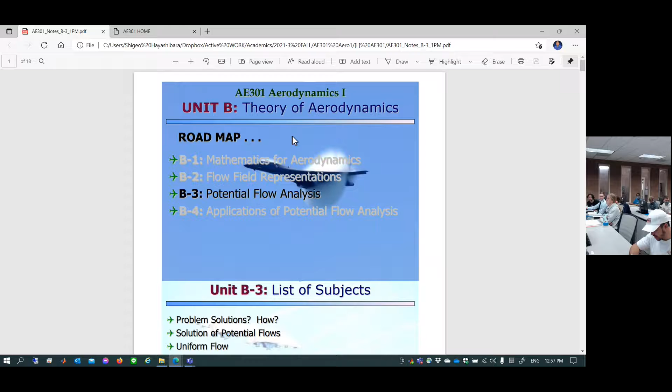It's such a fun class. Is it? Everything is so much fun. Everything you talk about. Okay, I'll say this. If you try, you will pass. If you do everything he says, you'll get a B, practically guaranteed. And since his assignments are open-ended, if you give more than what he asks for, he's willing to give you a 95 to 100. Oh, yeah. I've never had it. We'll see how that goes, though. Including last 8 classes.

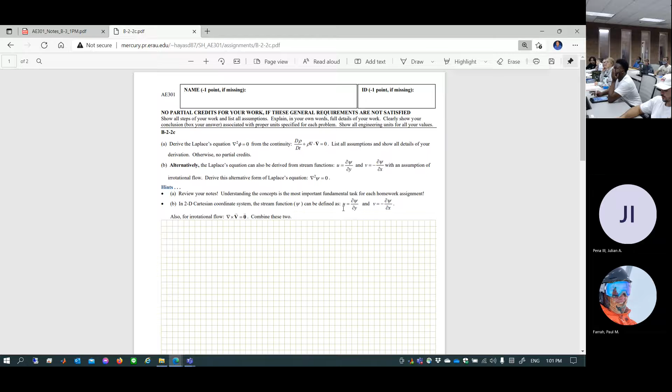So, as you know, you have homework which is due coming up Friday night. So, if you have any question, okay. One of the problems is probably impossible to do. What was the question, Michael? B-2-2c? Yeah. No, that's easy. Oh, it's not, then it's this one. B1. Oh, it must be this one.

This is probably something that if you really understand the stream function kind of problem, fine, but otherwise it's probably near impossible to solve. So I'm gonna show you my solution. I'm not gonna go over it, I just show you. And since it's videotaped, that means I release my solution. Can you also post it? I'm not gonna post it, I'm just showing you, because this is your work. But I just wanted to show you how I did it. B-2-2b, okay? This is actually quite important homework. B-2-2b.

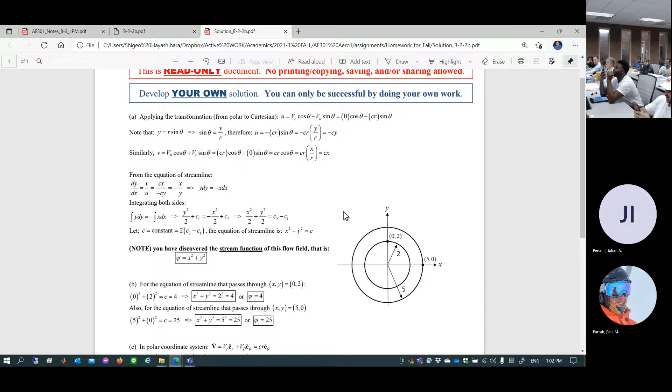Let's understand properly what I'm asking. I'm asking you to find the stream function of this field. That's the first thing you have to find out, because once you find the stream function, the rest is easy. The stream function is the solution of a Laplace's equation that governs the flow field.

The entire purpose of this unit B3, which we're beginning today, is solving the Laplace's equation using a technique called superposition of elementary flow solutions. That's what we're going to look at. This sets the very basic standard and purpose, and why you are doing what you're doing. Do you really understand it?

So velocity field is given. What is the original velocity field? Is it given in Cartesian? I think so. So the polar velocity field is given, and the first step is you're going to express it in Cartesian.

So velocity is given in polar coordinate. You're going to convert from polar coordinate to the Cartesian coordinate system, trying to express your velocity field in terms of x and y.

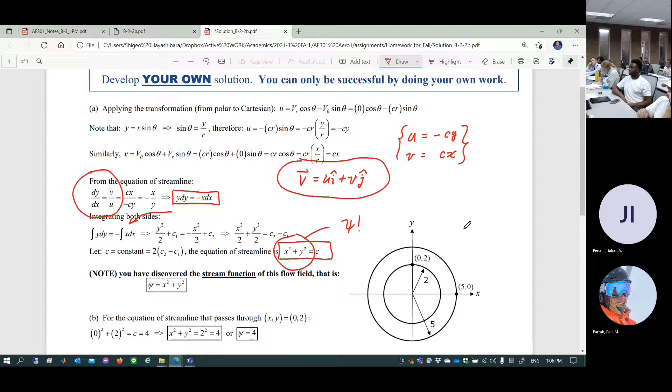So the rest is easy, right? Suppose you plug in x, y equal to 0 and 2, this defines a particular streamline, the equation of the streamline that goes through x, y equal to 0 and 2. That corresponds to the constant being 4. So this is the equation psi equal to 4.

What is the equation of the streamline that goes through x, y equal to 5 and 0? That gives you the constant becoming 25. So this is the equation of streamline psi equal to 25. Do you want us to draw the circle? Yes, because this is the equation of a circle. You can draw any number of streamlines by setting lots of different constant values.

That's what you're going to do in project 2A, 2B. Do you understand? Go ahead, question. I was just going to ask, because doesn't the aerodynamics of the particle go in a specifically circular motion, doesn't it?

It does, it's called a vortex. Yeah, it's a vortex type of flow. We've seen wingtip vortices, this kind of flow here. So this is actually one of those physical phenomena representing vortex flow.

So do we define a constant for psi and find an equation, or do we find a point that passes through to find psi first? Yeah, because this is the governing function. Now the rest is easy. If you set psi equal to different values of constants, that produces each one of those equations of streamline. No, my question is generally, are we setting psi to different values, or are we telling at different points what psi is?

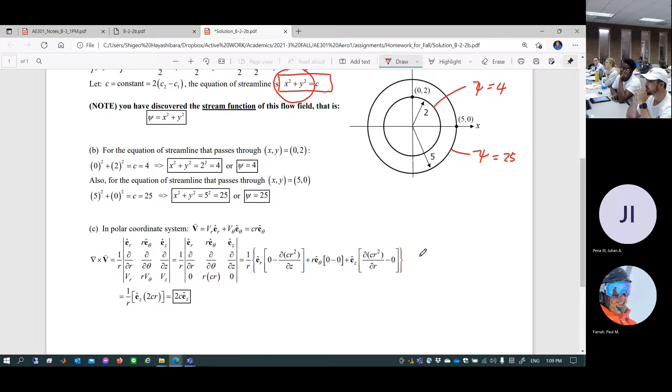Good point, Robert. Forget about all this, this is not even being asked this semester. So last semester, apparently, I asked you, okay, what is the vorticity of this flow field? That was problem C.

Sorry, oops, oops, sorry, oops. I shouldn't have said that because this could be a trap. I always do traps with my homework assignment because I create my own homework assignment. I can easily create a little bit of change and variation of it, to try to see if someone's copying from last semester without knowing what you're doing.

Does that explain why? Don't play games with me. Anyways, does that explain why? I appreciate your question, Robert. Really? The last solution, that's the solution.

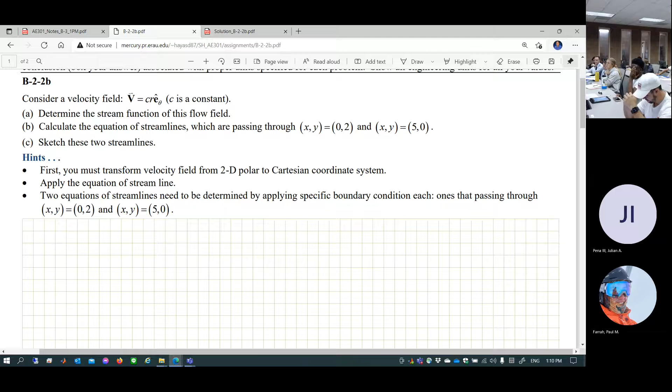Which one, from unit A? Which one, the way you were converting? Again, which one? Okay, okay, let's say, take a look at which one. That's the solution of unit A. Which one? It's for unit A. Which one? I would say A1. A1, A-1-2b.

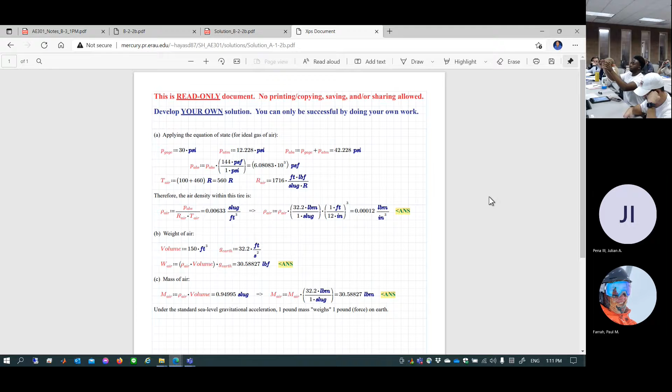Is that involved conversion? This is A-1-2b. There's just one part where like, you're converting, but the fractions aren't flipped correctly. Which one? I don't know if it's in that one or. I don't know, I studied it a long time ago.

I still don't know what you're asking. What are you asking? So, is that the trap you're talking about? Where, I can always create any trap. In other words, I pretend like, hey, this is the same problem, but I can change a little bit from last semester. So it looks like the same problem, but it's not.

I can easily do that because I create all the problems, I create all the solutions, I know everything. Would you send us there? I am the creator of this whole system. Okay, officially done, I know everything. So you cannot play games.

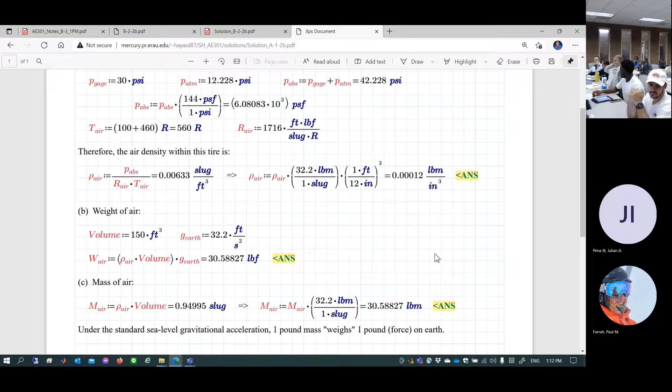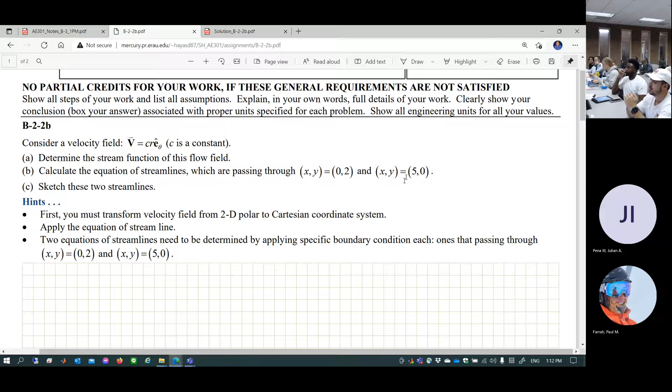So anyways, thank you for your question, Robert. Please be specific, I can walk you through that if you tell me which one you're talking about. Anyways, any other questions? So I showed you what I did. Forget about this, let's see. Let's see the sketch, right? This is the sketch.

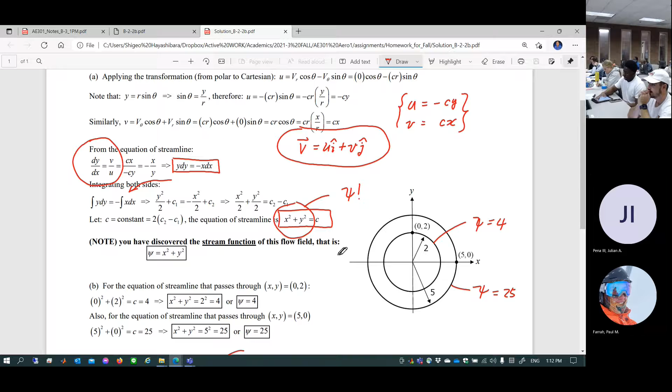So this is essentially a contour plot of the stream function psi of the flow field you define. That's exactly what you're going to do in project phase 2A and B. Understanding the concept is quite important. You can solve this kind of problem without knowing what you're doing, and that is very dangerous. It's easy because it's the equation of a circle, but why are you doing it? The purpose is to define the stream function that actually governs this flow field. That's the whole point of doing Unit B3.

Any questions on the homework of Unit B2? I have a question on the homework, but it's not on the project.

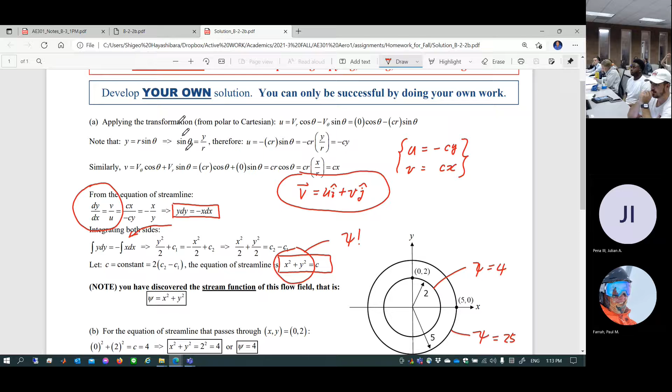Yeah, so project, okay. Project 2A, yeah? It's a fun project. It looks fun, I like the pretty graphs. Yeah, I want to be able to make those. It's just not happening yet. Shapes and colors, yeah. It will take some time to get it.

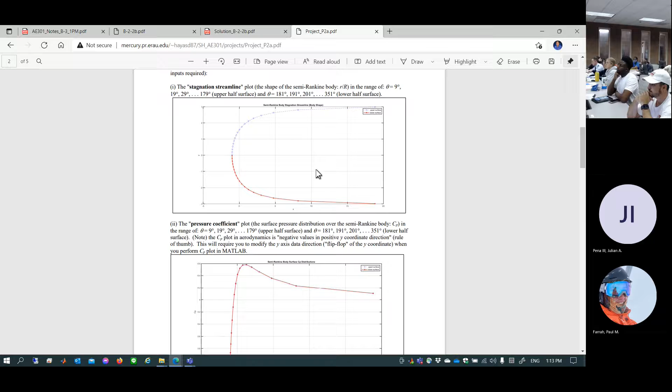In other words, project 2B, not 2A. Project 2A, you are going to actually do this kind of plot. This is what I hope to cover today or next class. This is a superposition of uniform flow and source, which is going to create the flow over like a leading edge of airfoil. And then the other one is, of course, flow over a circular cylinder with different values of the stream function equations.

In other words, this one represents psi equal to 0. This is one of those equations of streamlines. Psi equal to 0.4, this is a positive value, this is a negative value. You can draw any number of lines corresponding to each different value of psi. This is a contour plot, and each one of them represents the equation of a streamline. This is the psi equal to 0 line. This is the psi equal to 0.4 line. Psi equal to 0.8 line. That's what you saw in the homework assignment, right?

Okay, essentially it's the same thing. Once you know what psi is for this flow field, the rest is just drawing contour lines to represent the flow field. That is potential flow analysis. So I guess it's a great idea to start early, and as I move on in Unit B3, hopefully lots of these questions will be answered naturally, before you finish your project.

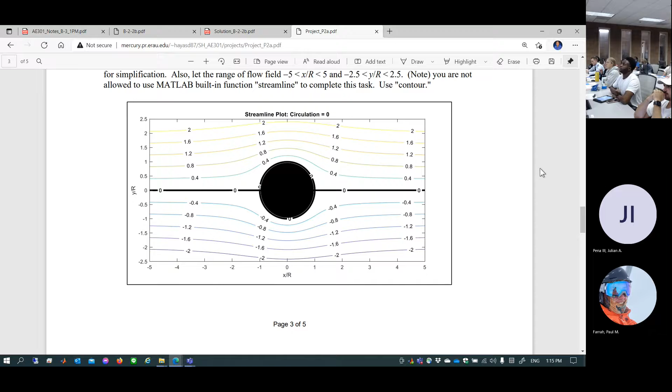So don't worry too much about it. As you get more understanding, it's going to be easy. The code itself is a piece of cake. I actually have a code here, but I think it's too early to show you. I coded everything in MATLAB. I'm going to show it, I'm going to share it with you. Well, I don't have to share because this is something you have to produce anyways. I don't have to share my code anyway. So if it looks similar to that, it probably works. Well, it looks exactly the same. It should be—not the same. Exactly the same, yeah, okay.

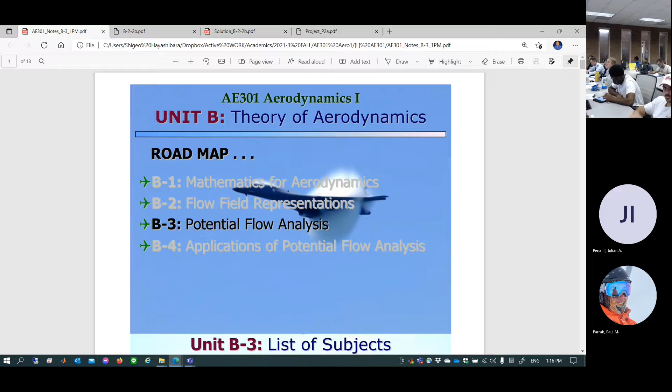All right, so let me get in. Let's get in and take a look at Unit B3. It's going to be exciting—actual application of potential flow analysis. Step-by-step mathematical process to analyze the flow field.

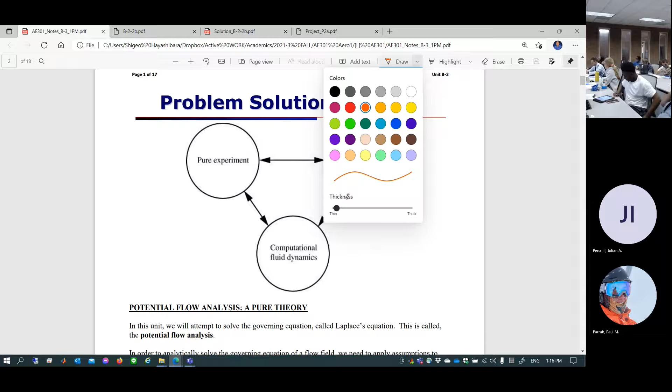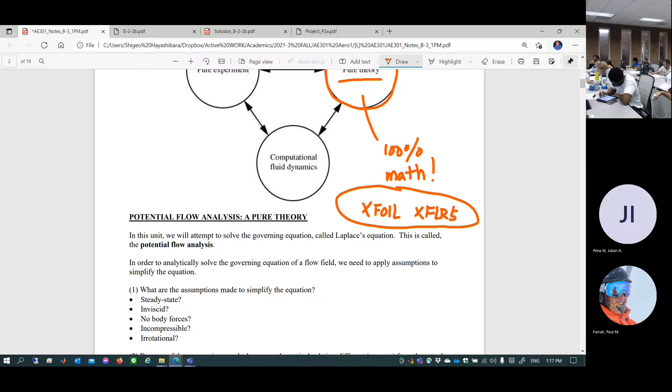So first of all, before we even begin, what are we going to do? This is all about the theory of aerodynamics. That means you're going to step right into pure theory—100% math. That's the reason why you can actually use software like XFLR5, XFOIL. This is essentially 100% mathematical analysis of the potential flow field. So before we even begin, we need to understand what simplification assumptions are already built in.

Simplified equations based on those conditions. So this is steady state flow. Viscosity is completely ignored. Body force is zero. That means gravity is not even considered. Incompressible means density is constant everywhere. Irrotational is quite an important mathematical simplification.

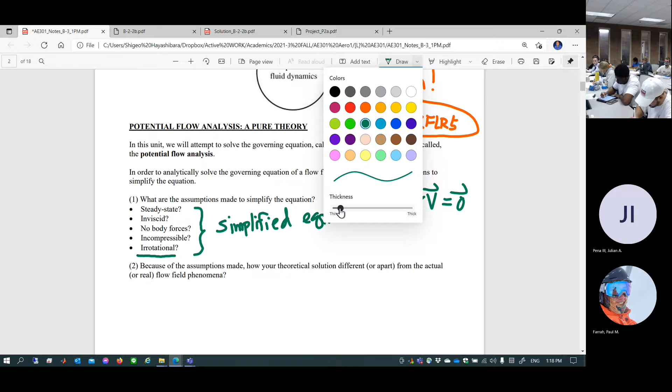In other words, vorticity, del cross V, if you compute it within the flow field, it's always zero. Irrotational flow field. And then you can say lots of interesting things. You can express an equation similar to Bernoulli, but not quite Bernoulli, something called the ideal flow equation, right? Like P plus 1/2 rho V squared is constant everywhere in this flow field, right?

And then once you know the velocity, you can determine the pressure coefficient, Cp is equal to 1 minus (V over V infinity) squared. This is called pressure velocity coupling. Okay? So those are the equations you can, of course, pick up and use. And then this is called ideal flow. Ideal flow is not equal to real flow.

So ideal flow behaves kind of weird because you're completely ignoring viscosity and density is constant everywhere. It's not going to separate over the surface. In a real flow field, of course, your intuition says if you pitch up your airplane like this, it's not going to fly, obviously. What happens? Stall. Separation. Of course, this kind of thing happens, right? This is real flow.

But if you do the same thing for an ideal flow field, it behaves differently. It behaves somehow like this, maybe. And then you go like, oh, wait a minute, I don't think so. So you have to be very careful. When you receive an ideal flow solution, you're not going to take it as it is and apply this result to real airplane analysis. You can't do that. Of course, this is ideal flow.

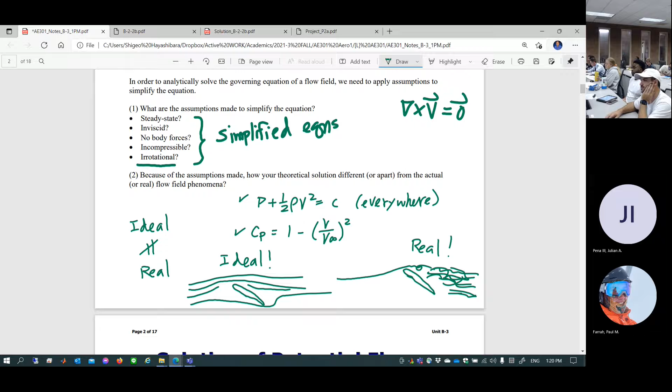This is ideal flow. And then what's the Mach number? Anybody? We don't care about Mach number. It's ideal flow. But we know density never changes. So realistically speaking, if the Mach number is 0.7, density is not going to be constant. You have to correct and modify the values calculated from ideal flow analysis. That's called the Prandtl-Glauert correction. We don't cover that. Software can do that, of course.

Go ahead. So is the reason there's no turbulent flow because it's irrotational in the ideal model? Turbulence. Where does turbulence come from? Flow separation. What causes flow separation? Viscosity. Viscosity is completely ignored. There's no boundary layer formed in ideal flow. If the boundary layer doesn't exist, we cannot even say whether it's turbulent or laminar flow, because that's all about the boundary layer. Flow separation is also boundary layer separation, but there's no boundary layer.

That implicitly means the flow hits the surface of this body, creating a stagnation point, then slides over the surface, then another stagnation point, and flows away. That's ideal flow: over the surface of the body, the flow slides over. In a real flow field, you have a boundary layer, velocity zero on the surface. There's no such thing here. But you can add those kinds of models later to make it a more realistic solution, okay?

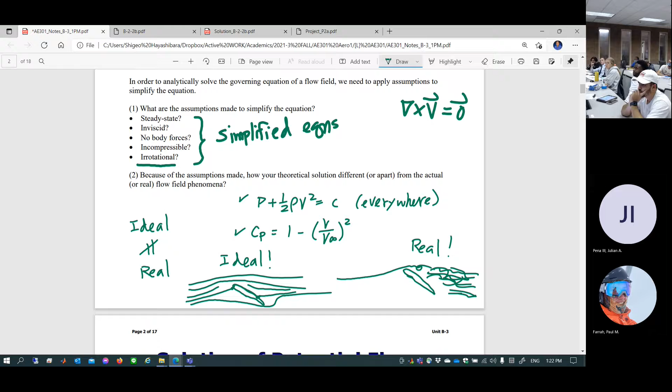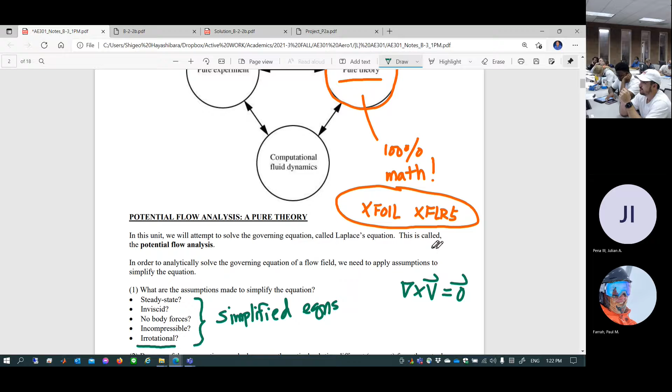So now we are talking about pure theory, meaning this is 100% math. In order to have 100% math, you have to simplify it and remove all those variables, otherwise you have to deal with second order nonlinear partial differential equations. Have you seen that kind of stuff? Do you want to do that? You can, but you cannot solve it by hand. You can only simulate using computer simulation, which is not a solution at all. So we are going to do hand mathematics. If we cannot do hand mathematics, it's not called the theory of aerodynamics, but we have to start from there.

It's always easy to make things more complicated. It's easy to start with, okay, I'm going to solve this three-dimensional airplane, fully turbulent, highly unsteady, high speed. Let's just solve it using CFD. People say that kind of stuff. Do you think you can do it within a year of your senior design? I can guarantee there's no way.

It's almost like you're saying, I need a PhD. By the way, I need it by next weekend. Same thing, you're saying that. There's no idea there. I mean, what do you think? It's an insult almost. I spent 10 years. I mean, practically speaking, I became blind because I read too many papers. Then I barely got a PhD.

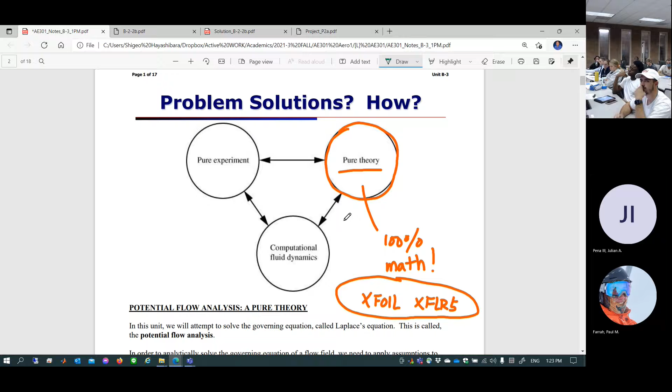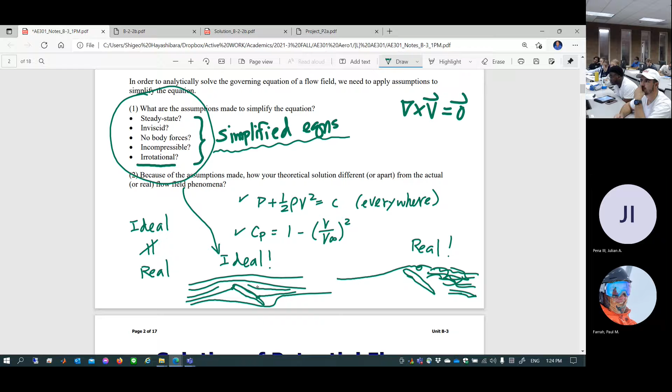Okay? Why is that? Because there are way too many things involved. Too many variables. And humanly speaking, you can never understand every detail of such a thing. But we try to understand because we apply simplification equations. Okay? So this is the background, always. And then what we can get is the ideal flow solution. This is not the real flow, but the great thing is this is a 100% pure mathematical solution. Okay? So let's begin. So this is a step-by-step process you're going to be involved in.

We are going to start with someone's already available elementary flow solutions of Laplace's equation. Elementary solutions exist for Laplace's equation. There are so many elementary solutions, and some of them are applicable directly to flow field analysis. That's called elementary flow field solutions of Laplace's equation. I'm going to introduce you to 4 different elementary solutions, okay?

Now, once you are given those elementary flow solutions, you are going to combine those. Okay, I can add uniform flow and source. That's going to create a kind of flow field. This is kind of similar to flow over the leading edge of a semi-infinite body. But I need a trailing edge too. Okay, let's superimpose source and sink and uniform flow. That is going to create a flow over a body with both leading edge and trailing edge.

Well, we want to do an angle of attack. Well, okay, it's just a shift. This is source, this is sink, uniform flow. Okay, well, this is some kind of body, leading edge, trailing edge, pitched up. But I want to have a NACA 2415. Okay, now what?

So now we are moving to the panel method. Okay, we are going to pick small tiny panels to represent the actual shape of your design. Then superimpose against uniform flow. Then set the surface equal to the stagnation streamline. So we are going to cover one step at a time. Okay. So elementary solutions, we are going to introduce first of all uniform flow. Uniform flow is something like this. Typically from left to right, magnitude V infinity in the positive x direction, uniform flow. Okay.

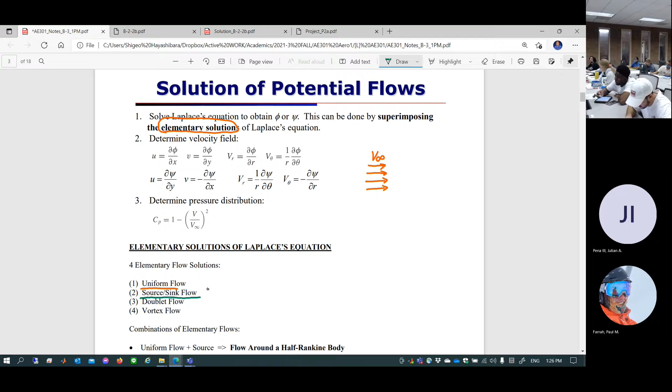The other thing is source and sink flow. This is, quite interestingly, a straight violation of continuity. Divergence becomes either positive or negative, which means mass can be created or mass can be destroyed, like a black hole. There's no such thing in a physical flow field, but this is source and sink flow. This is one of those solutions of Laplace's equation. We actually pick it up and use it for flow field simulation.

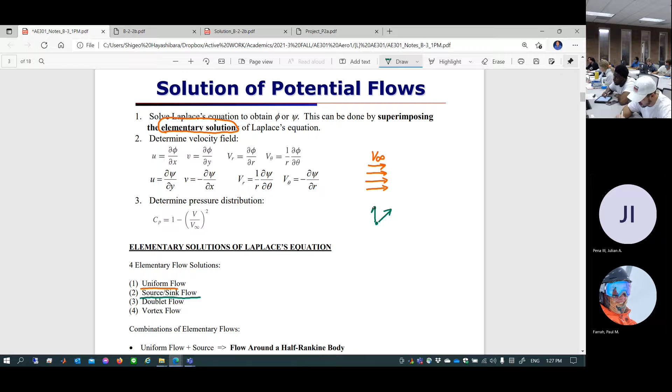So let's say a single point. Flow all of a sudden starts to happen from nothingness with a magnitude lambda. Magnitude lambda is a volume flow rate or mass flow rate, either way. Mass flow rate if it's compressible flow, volume flow rate if it's incompressible flow. This is called source.

Like I said, this is a straight violation of continuity. So you cannot really use this single point as a realistic mathematical solution for a real physical flow field. This is called a mathematical singularity point. Be careful. A mathematical singularity point is something you can never pick up as a physical solution of this whole thing. Okay. Sink is like a small tiny black hole. Right here, all the flow is sucked right in and disappears. This is called sink. Magnitude is negative lambda.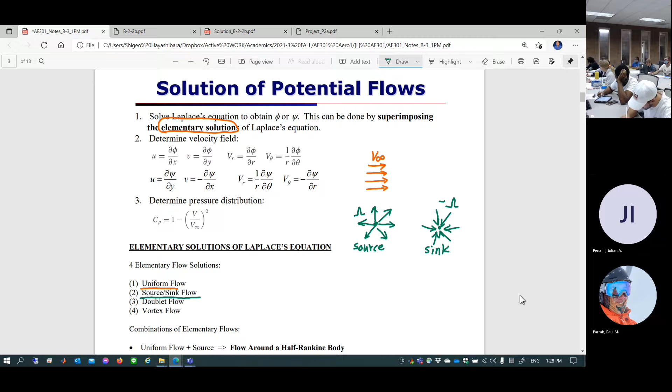Source and sink flow field. This is one of those elementary solutions of Laplace's equation. We can actually pick it up and use it to simulate the flow field. Okay. The other one of the elementary solutions, doublet. Question, go ahead.

What's that symbol next to your source? Lambda. Capital Greek. So draw a delta without the third bar on the bottom. Negative lambda. Yeah, that looks like an omega. This is omega, this is lambda. If you write it quickly enough, no one's gonna tell. Stop that third bar, and there you go. Stop completing the triangle. It's upside down. Do not complete the triangle. There, lambda.

This is omega. It's like octopus shit.

Okay, anyway. Lambda. Doublet. Doublet is a combination of sink and source pair at the single point with the same magnitude. So if those two combine into the single spot, it is going to create the flow field just like this, okay? Source creates the flow and sink sucks right in. This kind of flow field.

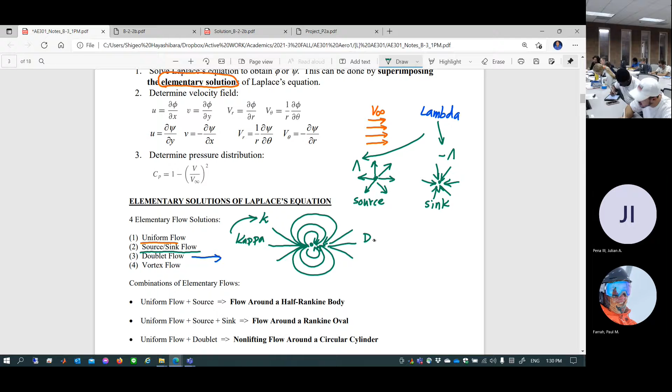Okay. The number 4 elementary flow solution is called vortex. You've seen it already. So vortex is a flow field which is essentially creating the streamlines of concentric circles around a single point. So this is called point vortex. Now this is again irrotational vortex. That means the vorticity is 0. However, there's a circulation. Magnitude of vortex is a circulation. Gamma. Uppercase gamma.

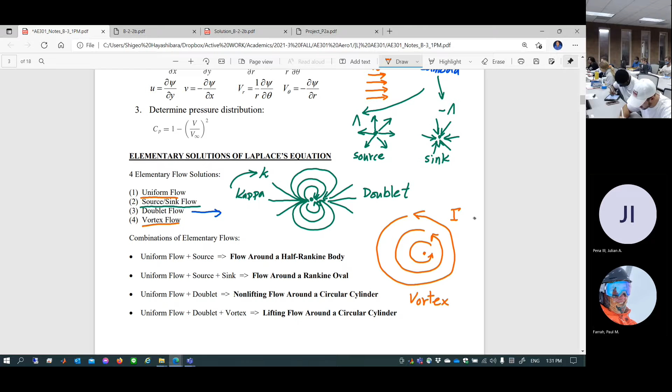So those are the 4 different types of elementary flow solutions. Then we can superimpose those things to create flow field. Question. If the vortex flow is going the other way, is it negative? It's negative, that's right. Is that the same for a doublet? Yeah. So doublet could be positive or negative, direction-wise. You could have a negative doublet, positive doublet. Left-hand side is source or left-hand side is sink.

For that example that you showed us in class for the homework, B2, is that stream function graphing a vortex then? That's a vortex, yes. If you have a doublet where half of it's a sink and half of it's a source, do they have to be of equal magnitude? It's a negative magnitude, direction-wise. It's going to be flip-flop, so negative sign comes up.

So what if they're not the same magnitude? If it's not same magnitude, it's gonna create a weird flow field, which is not doublet, but some kind of flow field. We can simulate that. I have software. So I'm gonna run ideal flow machine. This ideal flow machine actually simulates any of those. I'm gonna probably give you the website link for this toy. You can actually simulate.

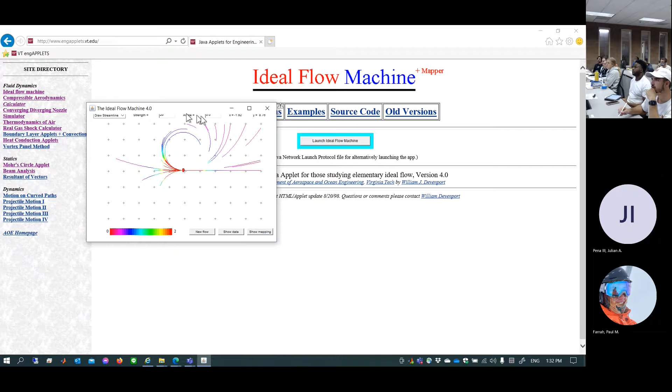So what is a doublet of a strength of like 20, and then put it in here. Then you can draw a streamline. So this is a doublet kind of thing. You see that? This is a doublet flow field. You can do any number of streamlines. The streamline is the same value of psi in the data field, the same thing as a contour plot. It's always symmetric.

So if you superimpose source and sink with different magnitudes, it's probably not gonna be symmetric. Are you allowed to rotate the doublet? I don't think so. Ah, you can. Rotate means what? The flow field. Well, yeah, you can do that. In other words, like an 8, it would be like an infinity.

Could be, I'm not sure. So that means you're going to superimpose in the y direction, so the source and sink pair is going to be staggered up and down. That could be. Okay. Anyways, you can do lots of things if you are curious. Let's just use this toy and find out. You can superimpose anything.

So like I said, those are the 4 different kinds of elementary flow solutions. In this class, I'm going to start with uniform flow plus source. This is the superposition of 2 solutions, source flow superimposed with uniform flow. This creates the flow field around a semi-infinite body, simulating the flow near the leading edge of a semi-infinite body. Uniform flow and a source and sink pair create the flow over some kind of body. If the source and sink have the same magnitude, it creates a symmetric body, so it's flow around an oval.

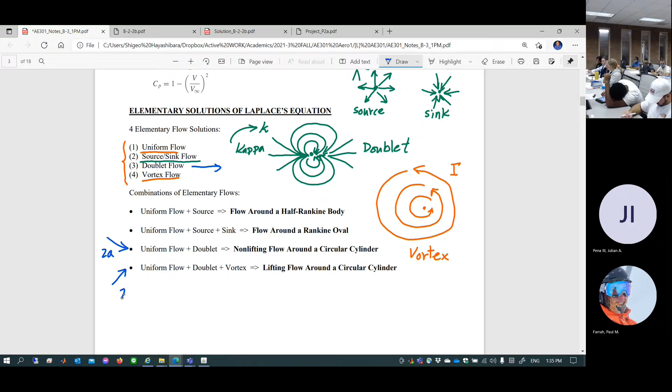So this is basically something you want to know. This is project 2A, this is project 2B. So stay tuned. Everything is purely math. If you don't understand your math, it's impossible to do project 2A and 2B, period. But if you know the math, it takes 10 minutes to code. That's my impression. If you don't know math, it's impossible. If you know math, it's a piece of cake.

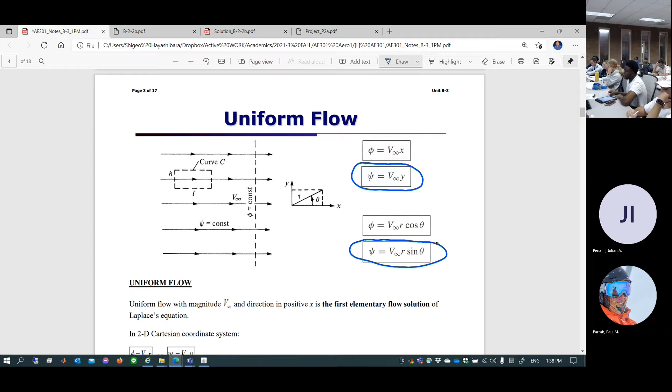One thing you have to understand is in your project, you always have to go back and forth transforming coordinates from Cartesian to polar and polar to Cartesian. You have to do that all the time. MATLAB can easily do that, right? Of course. So this is the solution called uniform flow. This is one of the solutions of Laplace's equation.

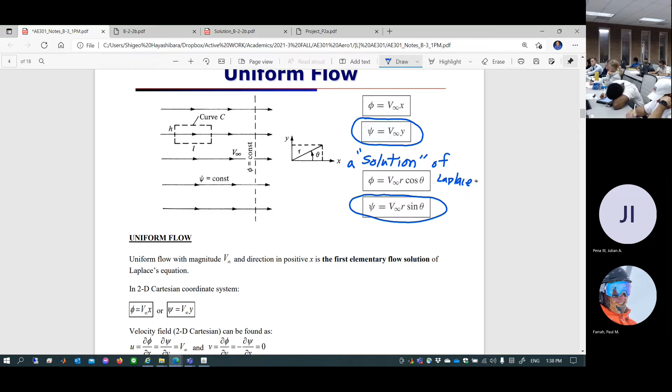Called uniform flow solution. Okay, so we are going to pick up psi. You can pick up phi if you want to. However, you can quickly construct the 2D velocity field out of psi or out of phi. So if you take the partial derivative of psi with respect to y, that is the velocity x-direction component u. Okay, if it's 2D Cartesian, velocity is u i plus v j. Or in 2D polar, this is going to be Vr e_r plus V theta e_theta, right?

So the velocity field can easily be given. Taking negative d psi dx is going to give you v. If it's polar coordinates, you can take 1 over r d psi d theta, which is V infinity cosine theta. V theta is minus d psi dr, which is negative V infinity sine theta. Those are the velocity field. You can quickly get it.

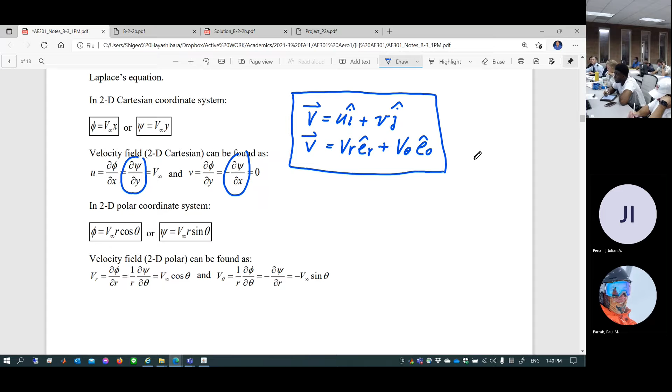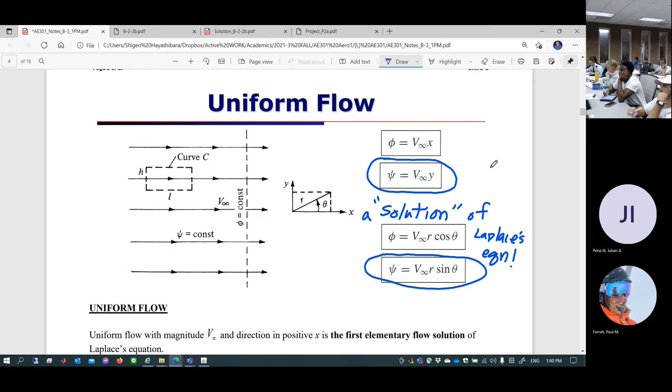So next thing is, let's just introduce you to source and sink. This is the second elementary flow solution of the Laplace's equation, source and sink, like I said. We are going to probably focus more on psi, the stream function. This is a solution of the Laplace's equation called source and sink. Source is positive, sink is negative.

Now for this kind of flow field, it's probably easier and more convenient to employ a polar coordinate system rather than Cartesian. The flow field is always velocity only in the radial direction. Tangential direction velocity is 0. Velocity is always in the radial direction, either outward or inward. This is called source. This is sink. The magnitude is lambda. So lambda over 2 pi r, that's the velocity Vr.

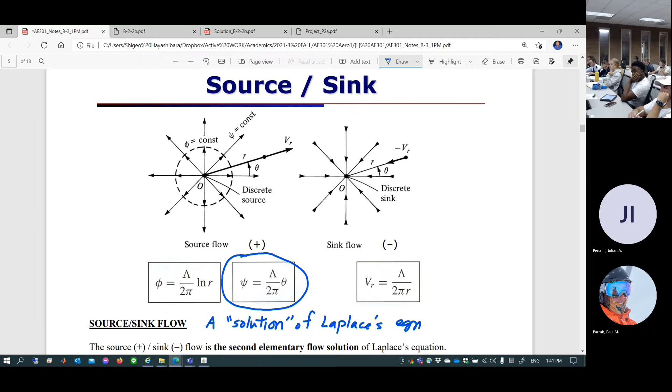How do you get that, by the way? Same thing. You're going to get the velocity field from 1 over r d psi d theta. So if you do 1 over r d psi d theta, you're going to get Vr. This psi is lambda over 2 pi times theta. So this is 1 over r d/d theta of psi, which is lambda over 2 pi theta. If you do this partial derivative, this is going to be lambda over 2 pi r, isn't it?

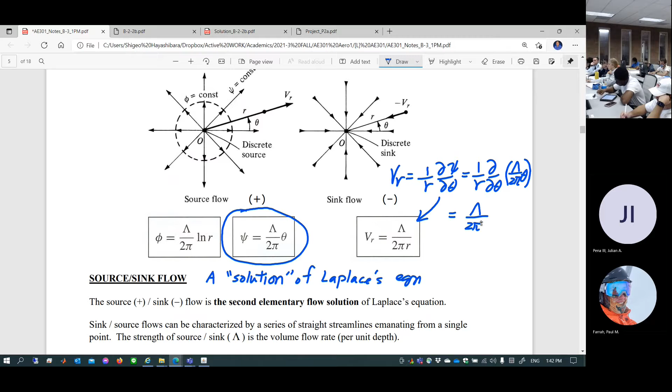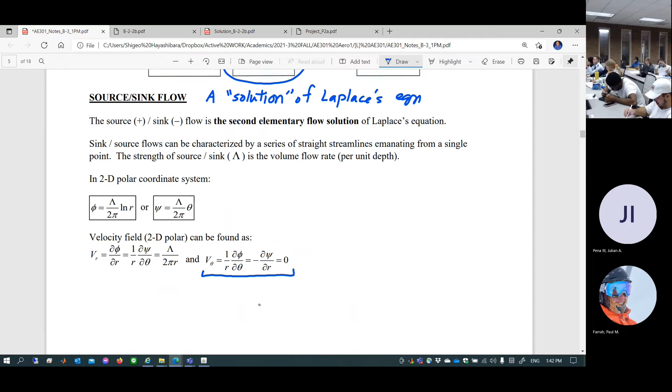So you can quickly get the velocity field. This is the velocity, very simple. Velocity is only the radial direction component. And obviously the velocity component in the tangential direction is 0. There's no velocity component in the tangential direction. This is called source and sink. And the important thing is right here and right here. Those are called mathematical singularity points. Let's be very careful. Mathematical singularity point.

This location is excluded from your analysis. That means right here, the location of the source and sink itself, you cannot use it as a physical solution. This is only a mathematical solution. Quite frankly, you cannot apply it as it is for physical phenomena, because right here it's a straight violation of continuity. Divergence is going to be either positive or negative. That is a violation of continuity.

Do you remember that? What is continuity? Del dot V is 0. This is continuity. That's going to be violated right here and right here. So let's be careful. We're not going to use this point and that point, point O, for a physical solution. It's only a mathematical solution. So this is source and sink, magnitude lambda. Lambda is a volume flow rate in this case, because this is incompressible flow. If it's a compressible flow field, it's going to be mass flow.

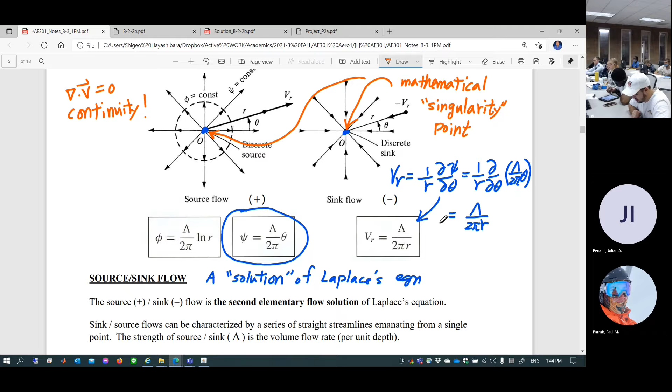If it's not good for a realistic idea, what is it useful for? Yeah, so we are going to carefully avoid using this location for actual flow field analysis. That means, okay, we'll find out. Let me go back to you a little later as we start using it. Any other question? I guess it's probably better to look at this with an application.

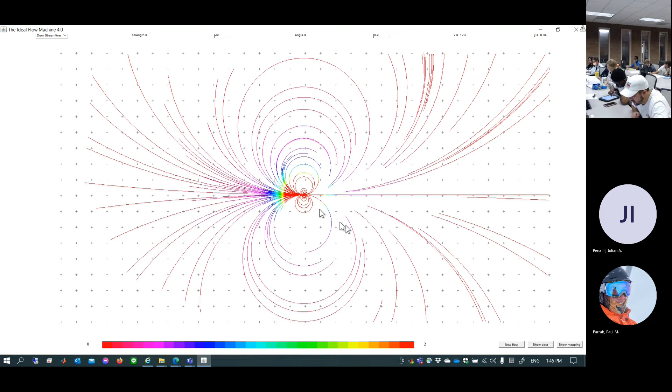So, good. Next page is application. First, superposition. Since I covered uniform flow and then source, let's superimpose those two to try to construct a flow field. I'm going to open my software, go for a new flow, and superimpose a free stream of magnitude, let's say magnitude 1.

And then superimpose with a source of magnitude 25, just a guess, here at point O, the coordinate origin. So now I superimpose the uniform flow and a source of magnitude 25. Let's start drawing streamlines. What kind of streamline can you draw? 25 is too big maybe, but anyway, you create a flow field like this.

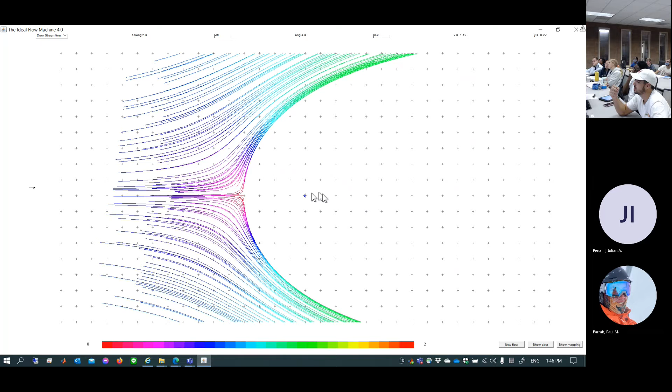Okay, flow field just like this. Looks like this is a stagnation point. You create a stagnation point right here over the body, and the flow is flowing over this kind of body. Now, the important thing is we are only interested in the external flow field, just like this. Inside of this body is a singularity point.

So this simulates what kind of flow field you'd expect if you placed this kind of body in an incoming uniform flow. Those are the areas we're interested in. Inside of the body, I don't care, because that's not useful information - it's a singularity point. So that's what we do.

So this is the location of the source. The source is going to repel against the incoming flow, sort of creating the body shape. This body is going to actually continue to infinity. So this simulates flow around the leading edge of a semi-infinite body. It's called the flow of a semi-Rankine body.

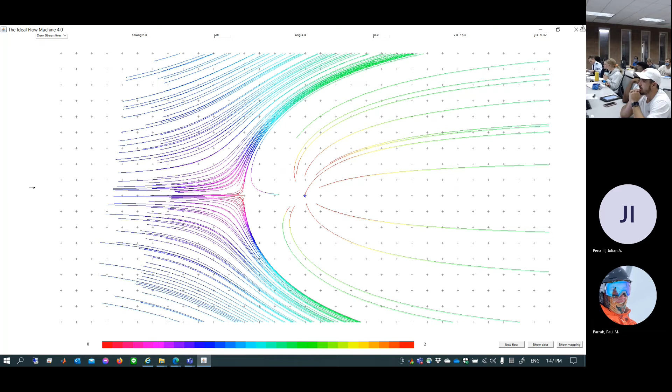Go ahead. What would happen if you tried to put a streamline in between the stagnation point and the source? Which is meaningless, this kind of thing. This is all trivial, something called a trivial solution. In other words, this is a solution around a mathematical singularity point - mathematically correct, but does it have any meaning in physics? No, that's the trivial solution, the flow field inside of the body is trivial.

So that means around here, this is called a trivial solution. We are not interested - mathematically correct, but we are engineers, we're not going to pick it up as a real solution. So this actually creates a simulated flow field of this kind of body - a body extending an infinite distance, creating a stagnation point right here. So this is the solid body in the flow field, a semi-infinite body. This is the simulated flow of a semi-infinite body, called a half-Rankine body.

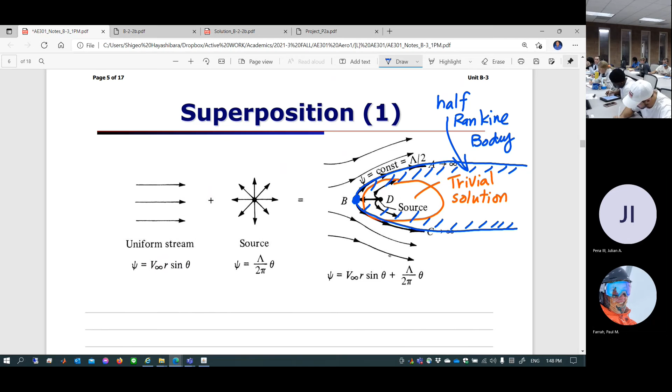Question, go ahead. I was just gonna ask, depending on the shape, does the aerodynamic center of a wing kind of relate to that? Let's not talk about the real thing, that's way too much of a jump. Let's do step by step. It's dangerous because this may not necessarily represent something real - this is just mathematical math. I just wanted to ask if it was somewhat similar to that. Somewhat, yes, but not quite similar to it. We have to kind of...

Later on, yeah. So this is like a very, very first step of what potential flow field analysis is. We have more sophisticated methods coming up right now. Then at that point we're going to talk about those things. Go ahead, question? Yeah, go ahead.

I was just gonna ask, if you take these sources and summate them over a camber line, and have a function that changes the intensity, is that how you get an airfoil? That is the same as airfoil theory, which is actually - if you're interested, that's called thin airfoil theory. You're not wrong, actually there is an idea for it, but it cannot simulate the thickness - it's only mean camber. Any other question?

So we are going to step in a little bit more, one step at a time. We are going to take care of the superposition next class, and then we're going to continue moving on. Okay, let's stop here today.

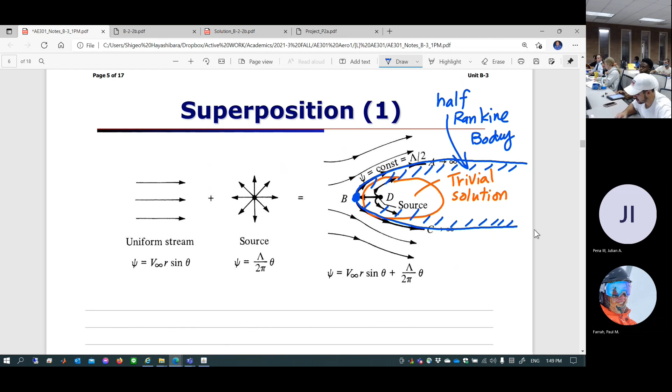The printer spit my thing out upside down, and I didn't bother to take it, so... Oh, it's stapled on the wrong side.